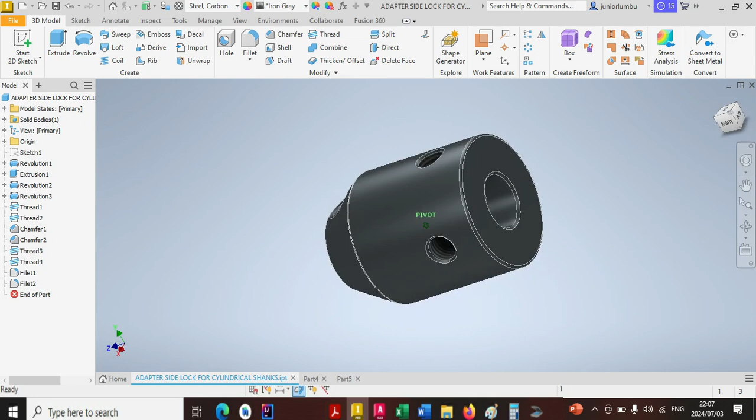Let's draw this adapter side lock in front of us. Our dimensions are in millimeters. So what we're gonna do is we're gonna come on new there. We go metric, standard millimeters, then say create.

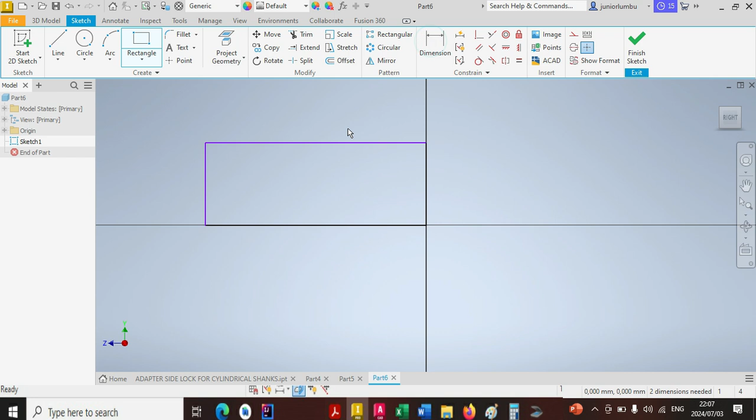In here we are going to start with a rectangle. So there is our rectangle. So from there up to there, and then we need to make sure that this one here is 40 millimeters. Good. And that one needs to be 15 millimeters.

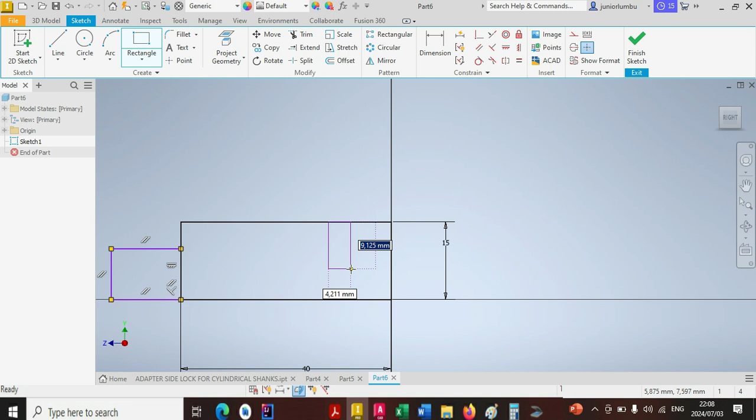All right. Now that I have that in place, I'm gonna come for another rectangle. So up to there. There is my rectangle, and another one here. There we go, without any constraint. Okay. And another one coming from here up to there. Now that I have that, I'm going to give dimensions.

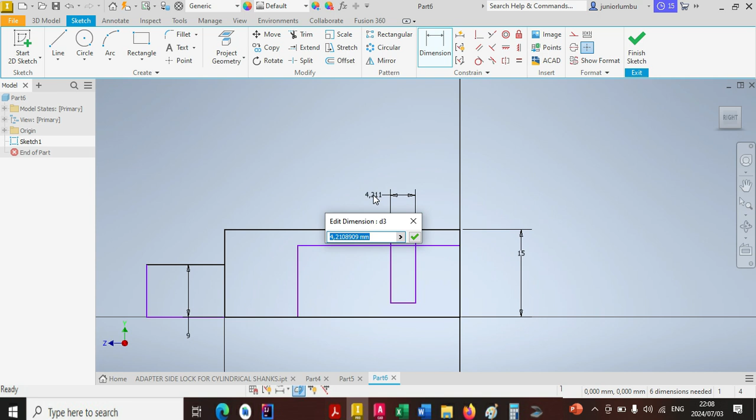So from there to that one, I need to have 9 millimeters. Okay. And this one here needs to be 3 millimeters. So 3. All right. And that one here needs to be 25 millimeters. So 25. Good. And now from here to there, I need to have 6 millimeters.

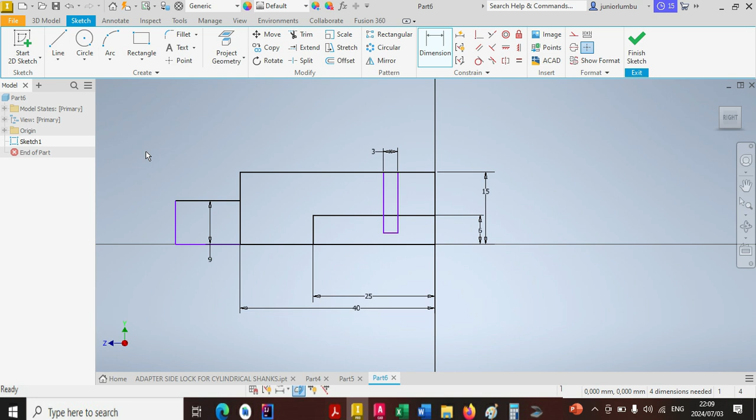All right. So now I'm gonna come for this straight line here. There is my straight line, and I'll make sure that from here to there I have 10 millimeters. 10 millimeters it is, and this one here needs to fall on that one like that. Now that I have that in place, I'm now gonna come for this

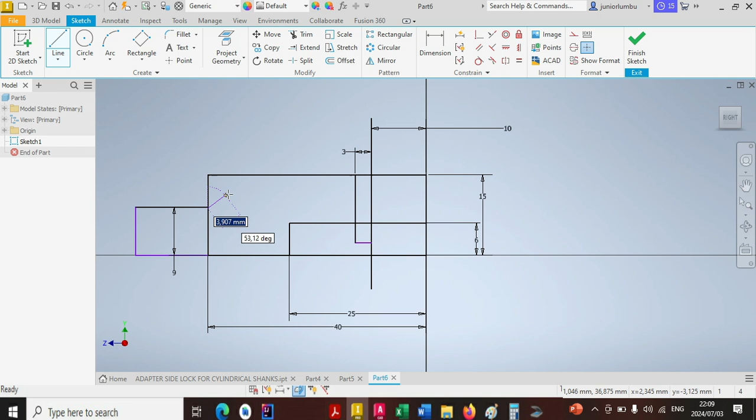rectangle here. So now first I need to come for this line, then I'm gonna come for the rectangle after. So there's my line. I'll make sure that from here to there I have 30 degrees. Good. That I have that one there, and from here to there I need to have 9 millimeters.

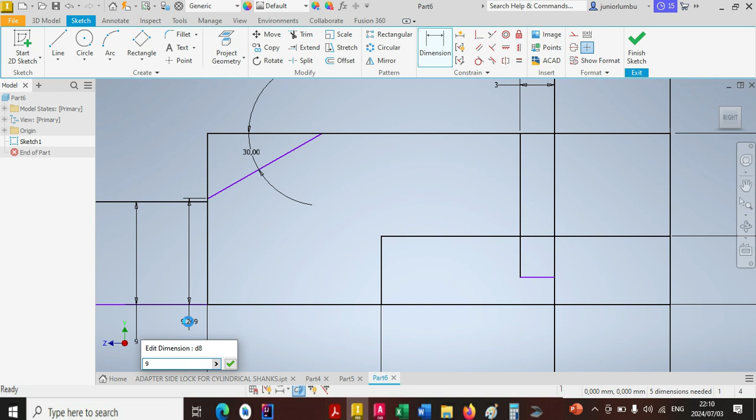Okay, that has moved up. Let's make sure that between this one and that one we have 0. Good. 9 millimeters, just like that. Okay, then I'm gonna come for this rectangle. So this rectangle is coming there. Okay, there we go, and then coming like this.

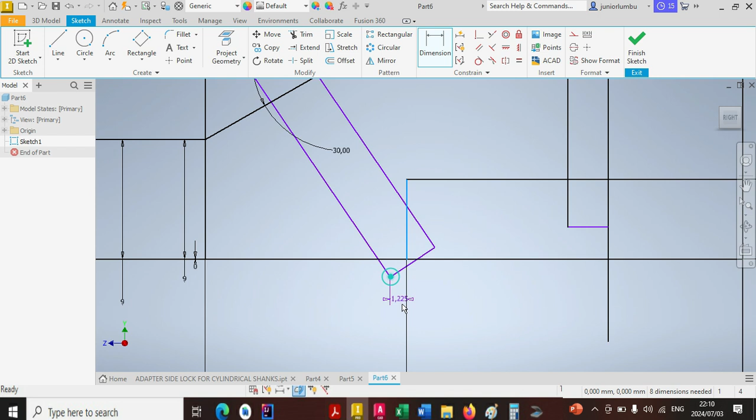Right. Okay, so this one here needs to be 4 millimeters. So 4 millimeters it is. Okay, and the distance between that one and that one needs to be 0. All right. Okay, and now the angle between this one here and that one needs to be 30 millimeters. Okay, sorry, 30 degrees. Sorry for that.

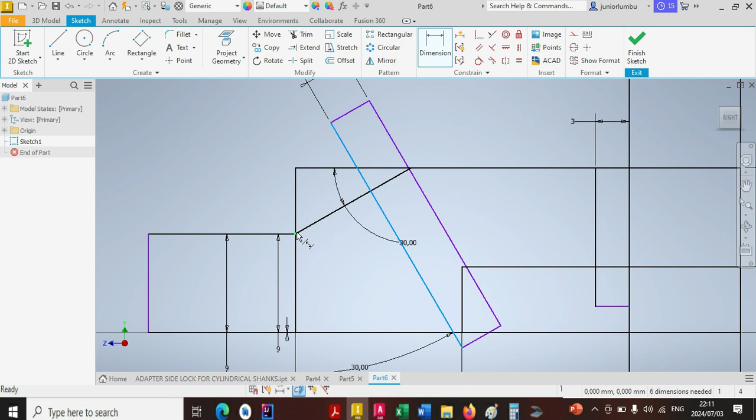And now I need to make sure that the distance between that one there and this one here is 5.5. Good. Okay, now that I have that in place, I'm going to draw this line here. The line will start, sorry for that, the line will start from there up to there.

Okay, like that. Skip. So now that I have that line in place, now make sure that from here to there, that line there is... Oh, it's already there, right? Cool, that's fine. Now that I have that in place, I'll come for this one here. I'm gonna have this arc drawn there, okay, like that. There you go. And from here to there I need to have 12. So 12.

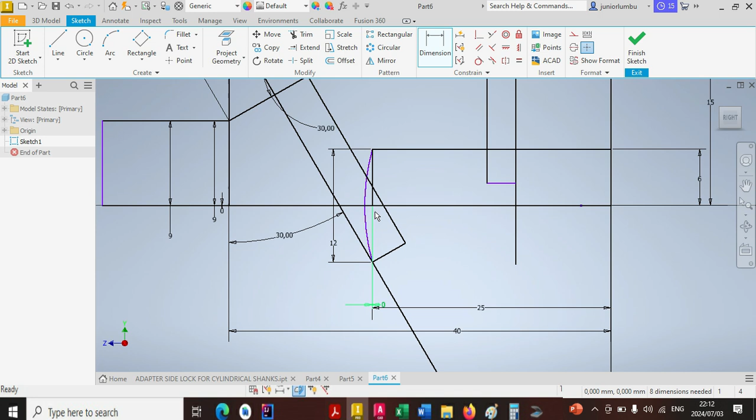Good. Okay, now that I have that in place, I'm gonna draw this line here. There is my line up to there. Then I'll make sure that the angle from here to there is 30.0. Enter. Good. So I have all this in place.

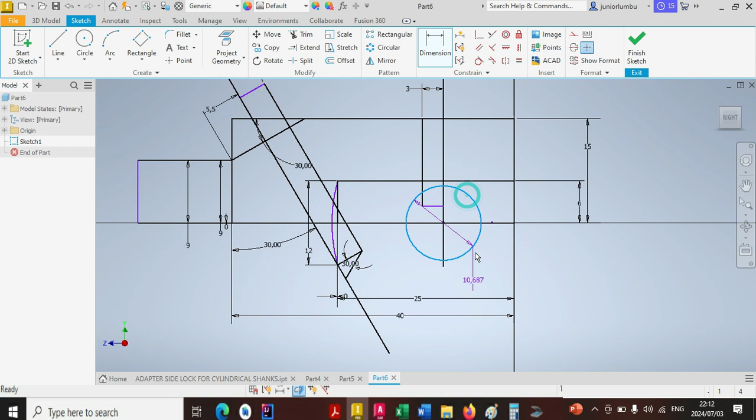Then I'm gonna draw this circle here. There's my circle, and this one here needs to be 6 millimeters. So that is 6 millimeters. All right, good. Now that I have this in place, everything is done now.

So I'm going to go on 3D model. I click on revolve. Now I want to create a hole. Okay, first I see that I forgot something. Let me draw my axis here.

There is my axis. You can also consider X as your axis. But now we are done.

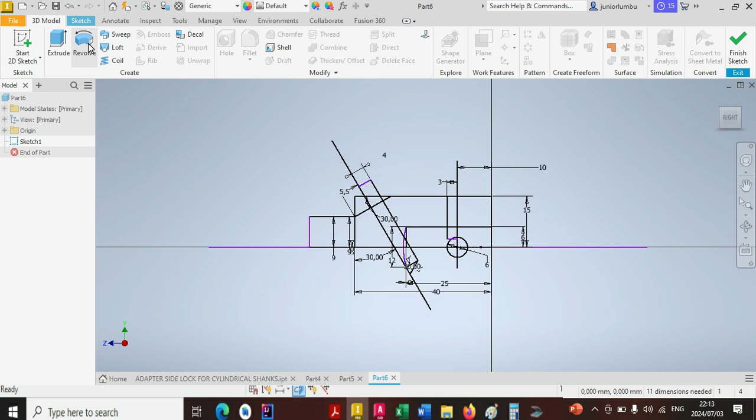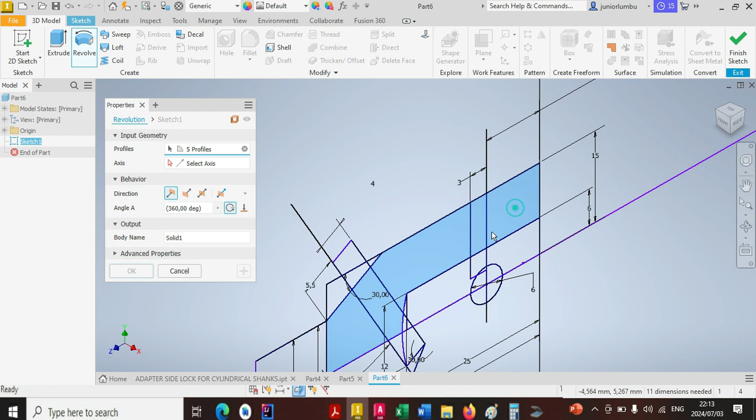I say revolve. Now I want to revolve. Remember, I want to have this hole there. So in here, I'm going to make sure that this one is full, that one is full, this one is full, and this one is empty. This one needs to be full, this one needs to be full, so it needs to be revolved against this axis.

After that I'm going to say plus. I'm going to cut this one against that axis. I say cut. Now I have a hole there, as you can see, I'm also having that hole over there.

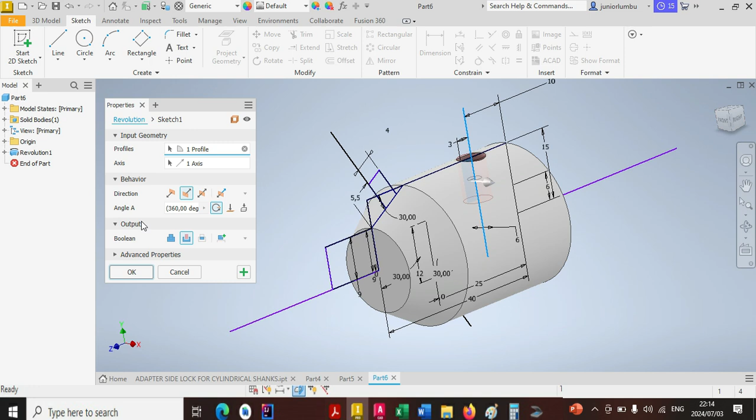Then after that again I'm going to say plus. I want to cut this whole thing, plus that against that axis. I say cut. Now I'm having that one there.

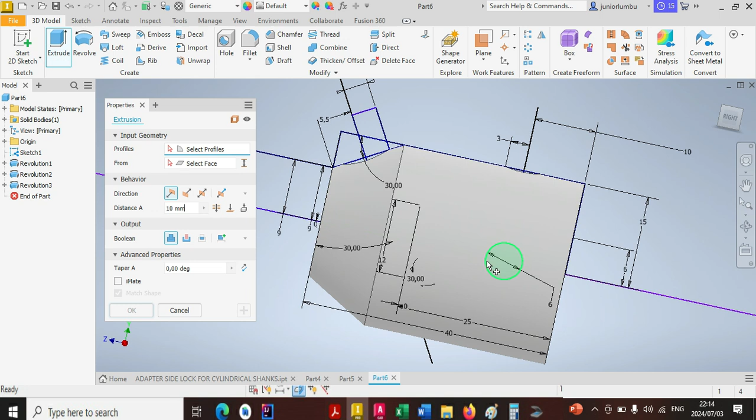Then I'm going to say visibility on. I want to have that hole over there, and I'm going to say 3D model. I'm going to extrude that hole, this one here, both sides of my drawing plane. Then I'm going to say by 100, the biggest possible, so it can cross the whole drawing. And then I say cut. Now I'm having that hole over there. Can you see that? Then I say visibility off.

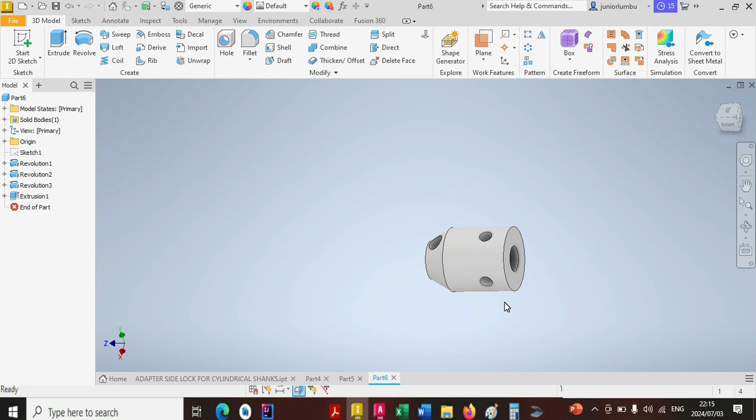After that, I'm going to create a chamfer here, of 0.5 there and there. I say okay - that's not a chamfer, that's a fillet. I say okay.

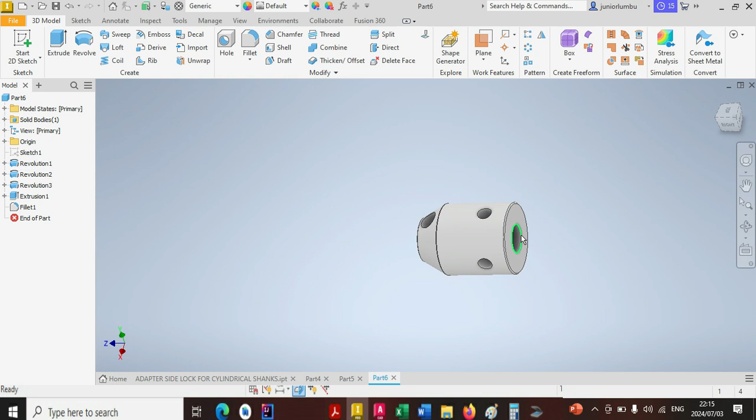Then after that, I'm going to create a fillet here, and sorry, that's going to be a chamfer now - here, there, as well as here, there and there, of this side as well, of 0.5, like that. Then I say okay.

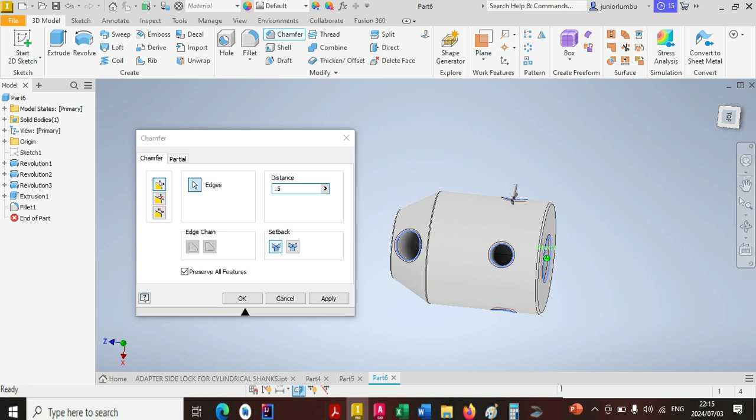Then I'm going to create a thread here, so I'm going to have a thread here. I want this one here to go 15 millimeters. Okay with me?

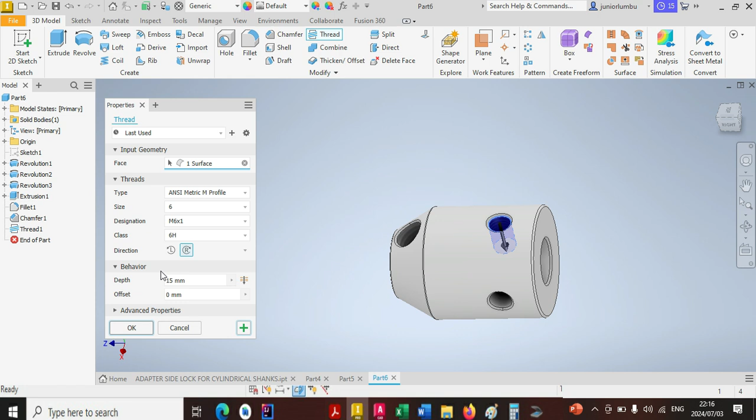So I say plus a thread in there. I don't think this one goes 15 millimeters - it doesn't, so still fine. Okay, plus thread in there. Plus thread in there, and I say okay.

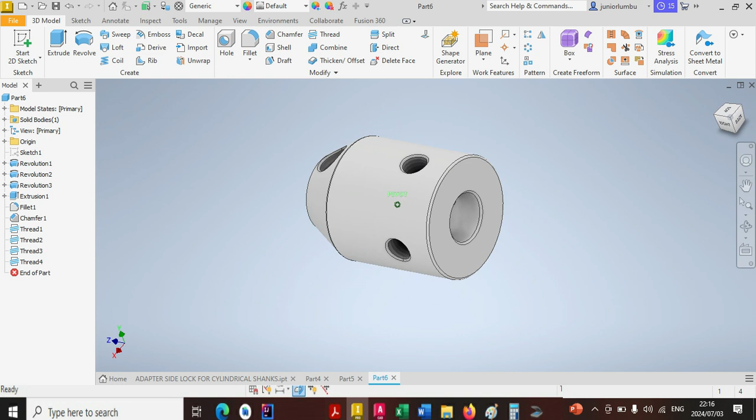So, did I put thread in there? Okay, and then I say okay. So now this is how your adapter side lock looks like.

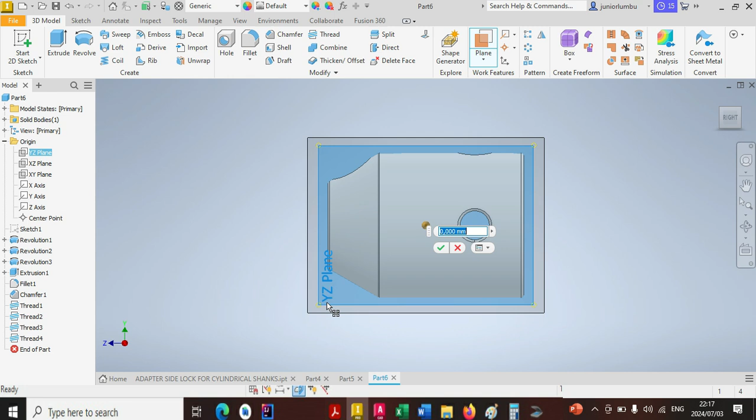So now if you want to see the shape inside of it, what you can do is you can create a plane. So which one? Yeah, that is fine. So you can create a plane there, and put 0 0 there. It's fine, and you do as if you want to create a new sketch. Now you slice the graphics.

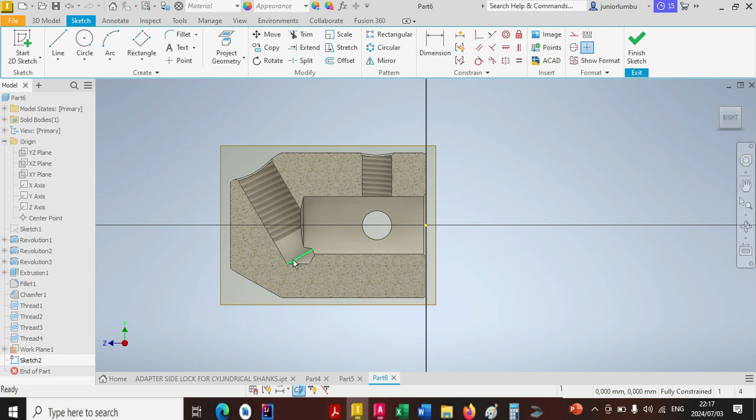Now you can see this is how beautiful it looks inside. Can you see that? You have that one there, you have your thread stopping up to there. You have that one over there, you have this one over there, you have that hole over there. Can you see that?

Then you say finish sketch. This is how it looks like, right? So you can remove that one over there, the plane, by doing that if you want.

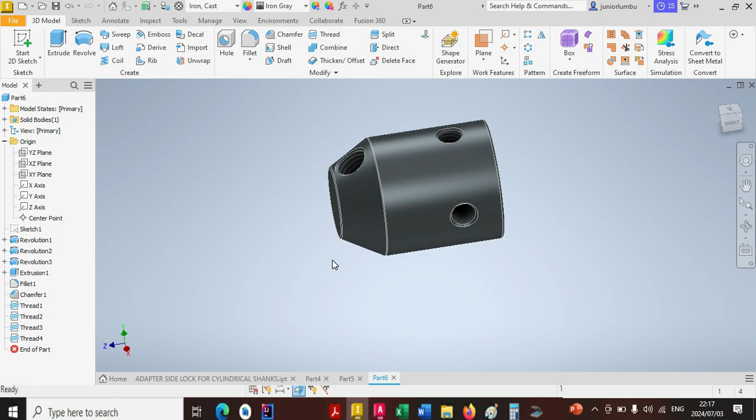So now you can give the material. Here you can come even for cast iron. What is cast iron? Yeah, that's one. Now you have your adapter side lock in front of you.